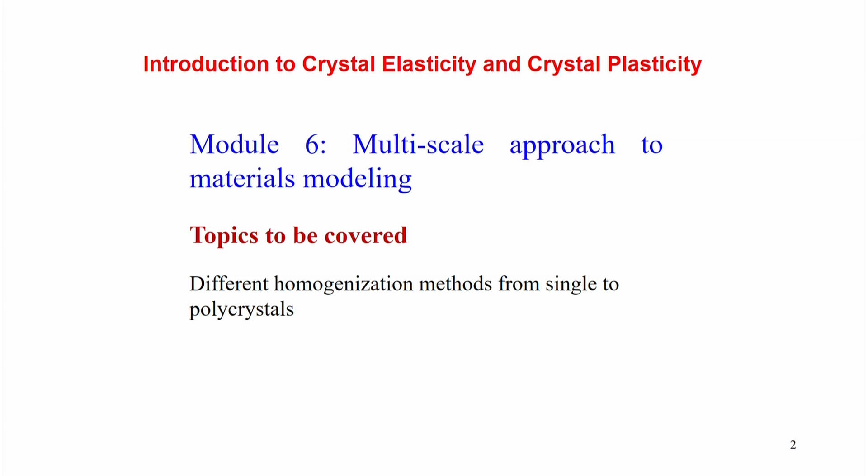Multiscale means we understand the modeling approach at different length scales or different time scales. The problem is how to link the different length scales and time scales, and what may be the consequence of the computational cost to do such different scales of modeling at a single time. Let us see how we can start with this.

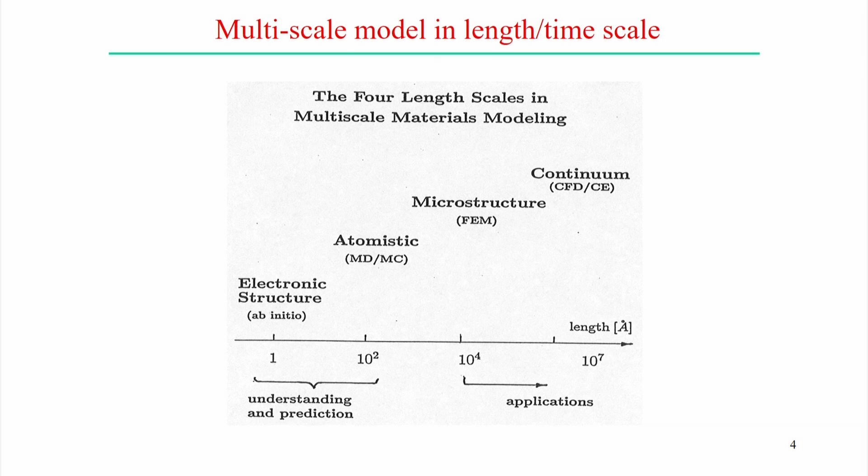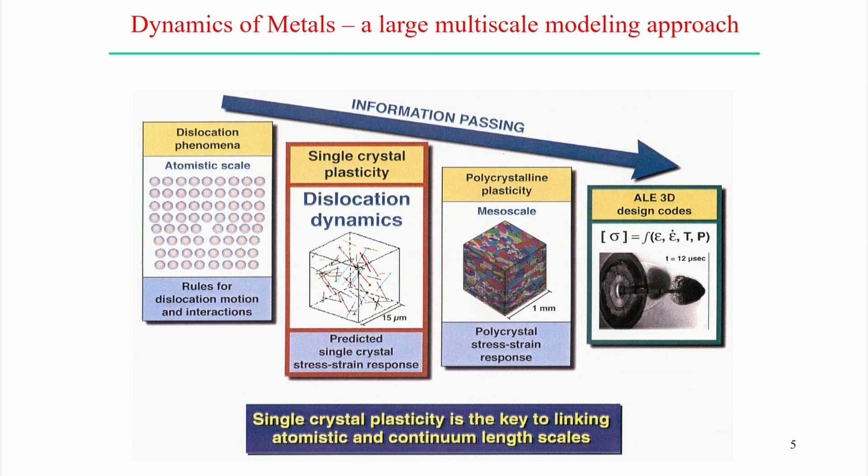In this case we estimated the von Mises yield surface, and from there we can predict the plastic behavior of the materials. So single crystal plasticity is the key factor to link the atomistic scale and the continuum length scale. But how we link between these two scales is most important in the multiscale modeling approach.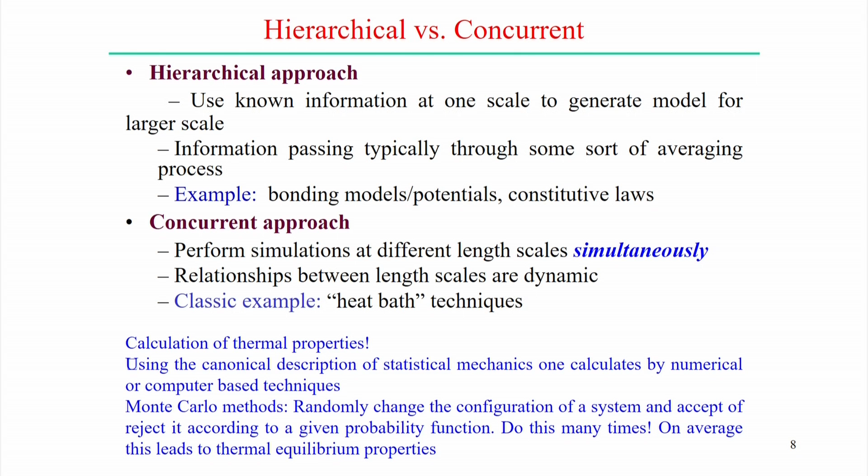So these are the typical approaches in multiscale modeling. Let us start with the atomistic methods. In this case, we use the empirical relation, and from the very beginning derived the force fields together with the semi-classical statistical mechanics to determine the thermodynamics and transport properties of the system.

But the statistical mechanics solve actually exactly. So of course the atomistic methods use the empirically derived force fields, but it can solve exactly the data. So what may be the advantages and the disadvantages of the atomistic method?

First one is that it can be used to determine the microscopic structure of more complex systems, probably on the order of 10 to the 4 to 6 atoms that constitute one system, and using that system the microscopic structure of the system can also be calculated.

But these models can also consider dynamical processes, probably on the longer time scale, up to the order of 1 microsecond. But on the other side, if you look at the atomistic methods, the results intuitively depend on the quality of the force field used to represent the system. So it's system dependent.

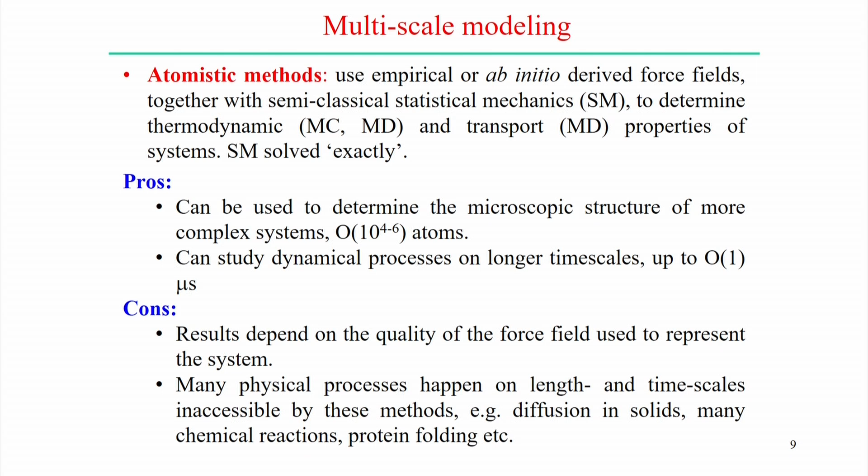Many physical processes happen on length and time scales inaccessible probably by these methods. For example, diffusion in solids, many chemical reactions, protein foldings - these types of physical processes are probably difficult to access using these atomistic methods. So that is the other side of these atomistic methods.

Now if we look into the mesoscale methods, they actually introduce simplification to the atomistic methods to remove the faster degree of freedom and consider groups of atoms as individual entities interacting through effective potentials. That means the cluster of a group of atoms represents one property, one state, and that can be considered in the mesoscale method. So probably this mesoscale method is the higher scale approach, higher in the sense that the length scale is bigger here as compared to the atomistic scale.

So the advantage is that it can probably be used to study the structural features of complex systems. In this case, the cluster of atoms or group of atoms can be considered of the order of 10 to the power 8 to 9 atoms to represent the system.

Dynamical processes on a time scale inaccessible to the classical methods, even up to 1 second, can be studied using the larger time scale of mesoscale methods. But the disadvantage, the darker side of these methods, is that it often describes only qualitative tendencies. The quality of quantitative results may be difficult to ascertain sometimes. In many cases, the approximations introduced limit the ability to physically interpret the results. So these are the two disadvantages if we consider the mesoscale methods.

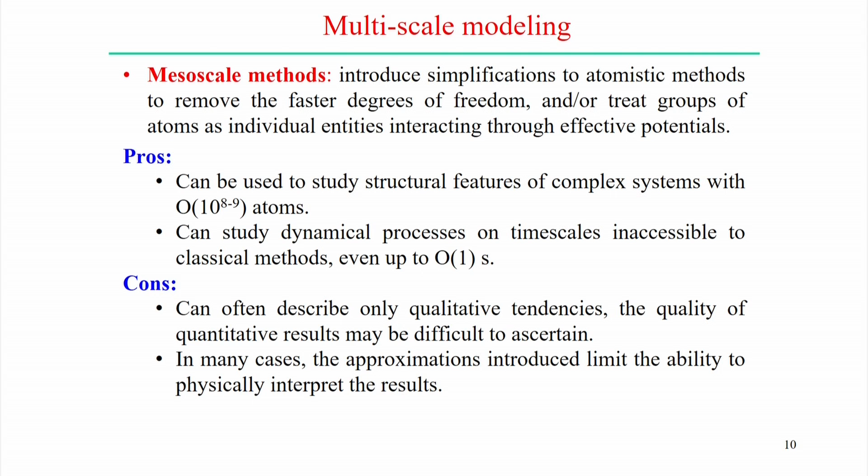Now continuum methods. In this case we assume that matter is continuous and treat the properties of the system as field quantities. We numerically solve the balance equilibrium equations coupled with phenomenological equations to predict the properties of the system. So this is the basic philosophy of the continuum methods.

In principle it can handle systems of any macro size and dynamic processes on a relatively longer time scale, as well as longer length scale. It is possible to numerically solve the balance equation. We generally solve the numerical governing equation on this scale.

But the difficulty is that the required input, for example elastic tensor, diffusion coefficient, equations of state from experiment, or derived from lower scale methods, is sometimes difficult to obtain. It cannot explain results that depend on the electronic or molecular level of detail. So continuum methods have advantages at one scale, but probably cannot capture the behavior of the system at the molecular level in detail, or the electronic structure in detail. In that case we need to consider lower scale methods, probably the atomistic scale model.

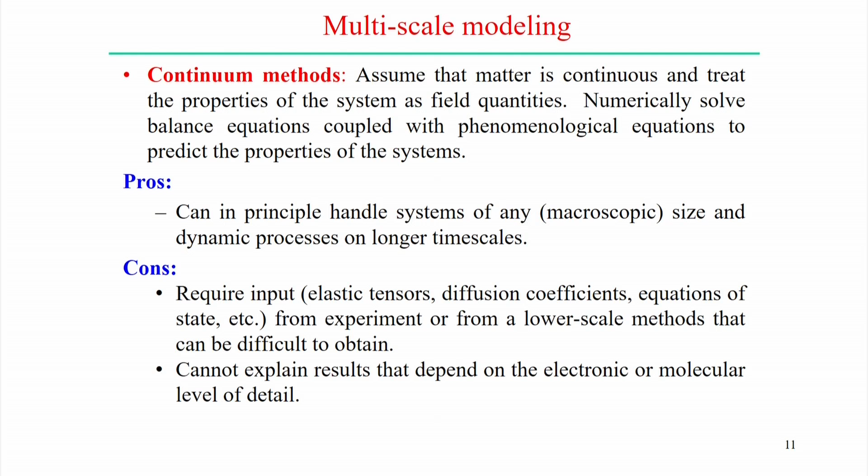Now of course there are different scales of analysis, and each and every scale has its own limitations or advantages in different ways.

The most important or significant thing in multiscale modeling is how we can connect different length scales. One approach is called upscaling methods, using results from a lower scale calculation to obtain the parameters for a higher scale method. This is relatively easy to do, and it is generally called a deductive approach.

Maybe we can look at an example to understand the upscaling method: calculation of phenomenological coefficients, for example the elastic tensor, viscosities, diffusivities, from atomistic simulations for later use in a continuum model. This is one example of the upscaling methods.

Fitting of the force field using ab initio results for later use in atomistic simulation is another example. Also, deriving the potential energy surface for a chemical reaction to be used in atomistic molecular dynamic simulations, and deriving the coarse grain potential from clusters or blobs of matter, or maybe polycrystal, from atomistic simulation to be used in mesoscale simulation.

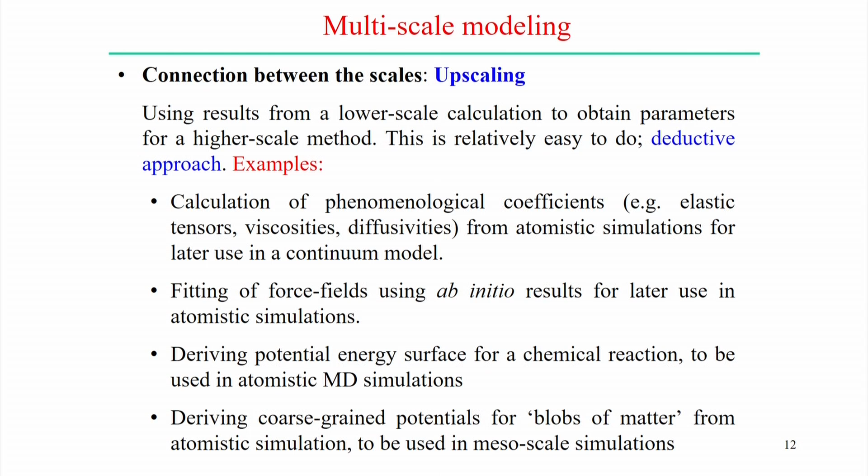So in all upscaling methods, we always try to link the lower scale properties and behavior in aggregate with the higher scale, or if there is any phenomenological behavior required for the higher scale methods, we can generally derive it from the lower scale method. That is the basic philosophy of upscaling methods.

Similarly, in the downscaling method, the basic philosophy is using higher scale information, most often experimental, to build the parameters for the lower scale method. But it is more difficult compared to the upscaling method because of the non-uniqueness of the problem.

We can take some examples. The results from a mesoscale simulation do not contain atomistic detail, but it would be desirable to use such results to return to the atomistic simulation level. That is called the inductive approach.

For example, fitting of the two electron integrals in semi-empirical electronic structure methods to experimental data such as ionization energies, electron affinities, etc. is one example of the downscaling method. Another is fitting of the empirical force field to reproduce experimental thermodynamic properties, for example second virial coefficient, saturated liquid density, and vapor pressure.

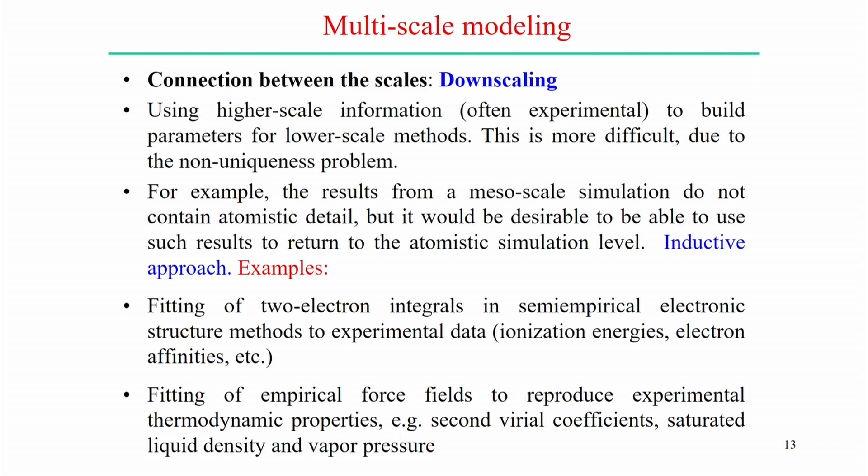Although theoretically it is more difficult, the downscaling approach links information from the higher scale to predict the behavior of the lower scale. But the other way, if it is possible theoretically to predict, experimentally it is easier to conduct experiments on the higher scale as compared to the lower scale methods, so in that way it is advantageous. So, looking at these two approaches, upscaling and downscaling, in the multiscale modeling.

Now, in general, a few significant points are important. First, in many physical problems, several scales are present in space or time, probably caused by inhomogeneity of the medium or complexity of the mechanical process. So a fundamental approach is to first construct the microscale models and then deduce the macroscale laws and constitutive relations by properly averaging over the microscale.

So if we look at the microscale and mesoscale models, we see the basic fundamental approach of multiscale modeling: linking the averaging of the lower scale and using this information for the higher scale approach.

The perturbation method of multiscales can be used to derive the averaging equations for a much larger scale from consideration of the small scale. So, in the mechanics of multiscale media, the analytical scheme of upscaling is generally known as the theory of homogenization.

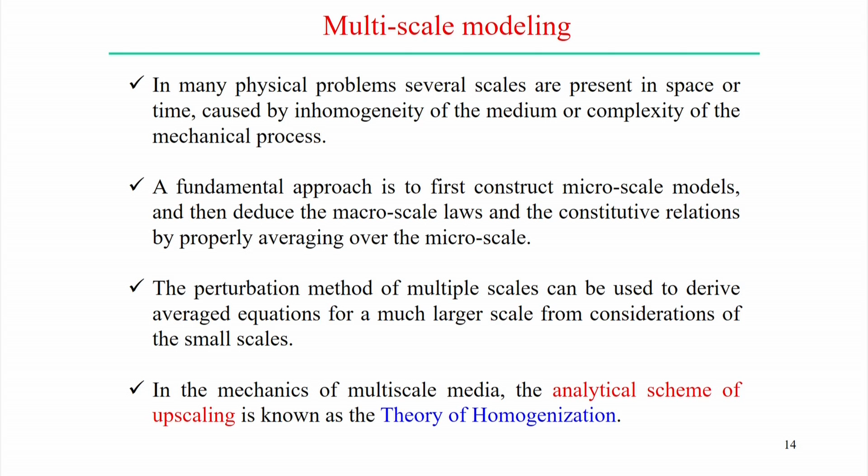Ultimately, the more practical approach in multiscale modeling is to consider the upscaling approach, which is relatively easier. Now let's look at some examples.

Let's take one example of the multiscale modeling approach: carbon nanotubes under tension, using atomistic results. In the first figure, expansion to a larger system and longer simulation times actually allow exploration and discovery of new behavior. So if we allow for longer simulation time, we can do simulation-based design and explore new behaviors. Let's look at this example.

At low strain values and high temperature, under that condition, the 5775 defect behaves as a dislocation loop. This constitutes one dislocation loop, made up of two edge dislocations, that is the 57 and the 75. Now, the two dislocations can migrate on the nanotube wall through a sequence of bond rotations.

Through a sequence of bond rotations, there is a glide direction, so the two dislocations can migrate separately along this glide direction. So in that direction, the two dislocations migrate here.

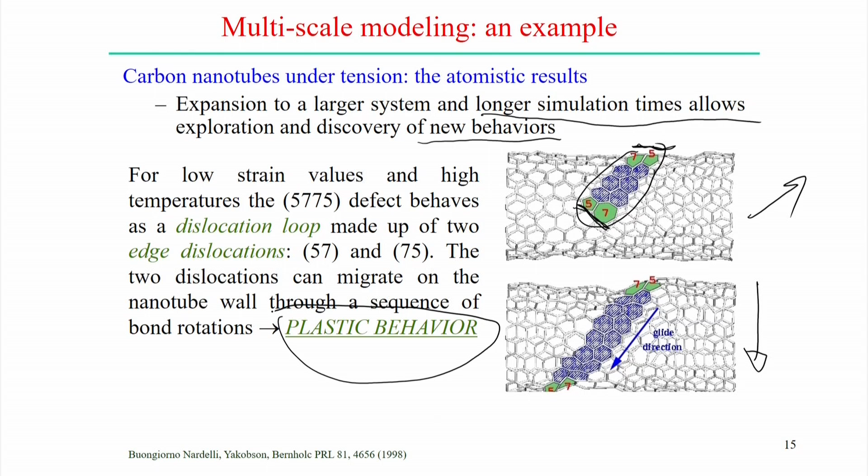In high tension and low temperature conditions, this predicts brittle behavior, whereas in moderate tension, it can predict plastic behavior of the carbon nanotube. These are typical examples of simulation-based design that we generally observe in the multiscale approach.

Now this is carbon nanotubes under compression, but this is a mesoscale result, so the scale is different here. Expansion to a mesoscopic system through finite element methods, with parameters modeled upon atomistic calculations. If we see axial compression simulation of 9 walls of carbon nanotubes and stress in the axial direction, that color predicts different deformation behavior corresponding to different stress levels and axial direction.

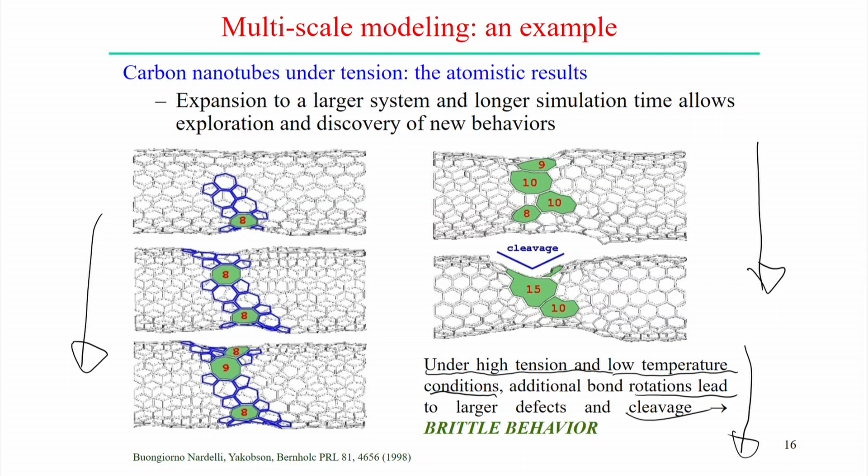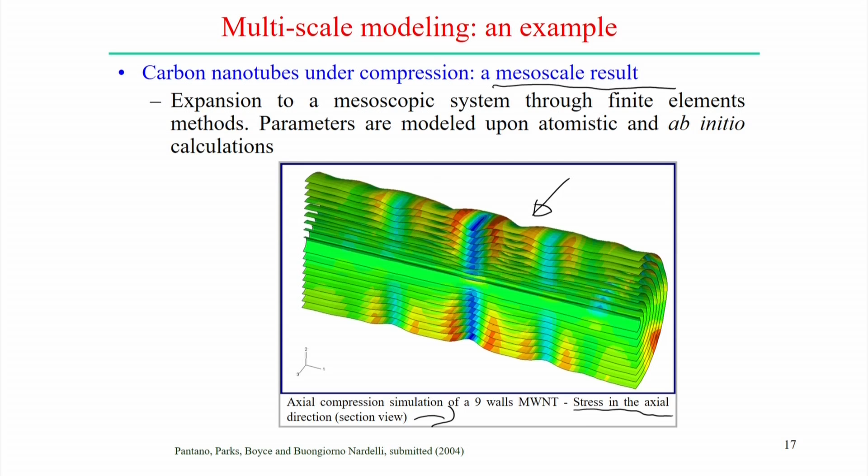So the point here is that the simulation can be done at different scales. If we conduct the experiment at the mesoscale, we can predict different behavior, and that is possible if we consider the different multiscale approach here.

In general, with multiscale modeling of materials, we always try to understand the molecular level origins of material behavior, but predict the behavior of materials from first principles. Along the x-axis and y-axis, the length scales are different, and time scales are also different. At the lower scale, femtosecond time scale and nanometer length scale, that can predict the behavior of electrons.

As a whole, at the next level, molecular dynamics predicts the behavior of atoms as a whole. Then using the behavior of atoms, we can get the mesoscale, mesoparticle behavior as an aggregate, taking information from the atoms. At the next level, we can consider the macro scale approach with elements, where the length scale is in the millimeter range and the time scale is in seconds.

This time scale or length scale is completely different from the other scales - there is a huge difference in all these things. But through the multiscale modeling approach, we can link the different scale levels, taking information from the lower scale level up to the upper scale level, even though the behavior or calculation theory is different at all scale levels. But if we try to predict with a multiscale approach as a whole, we need to link all the different scales. This helps to design new materials or devices with improved performance.

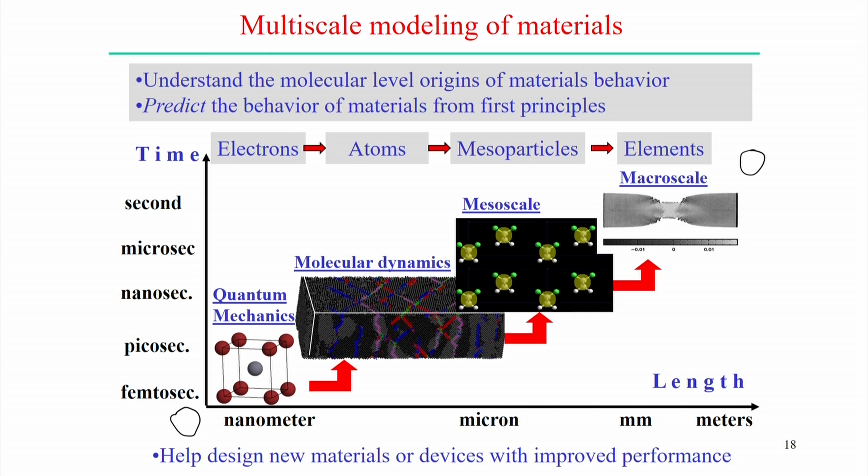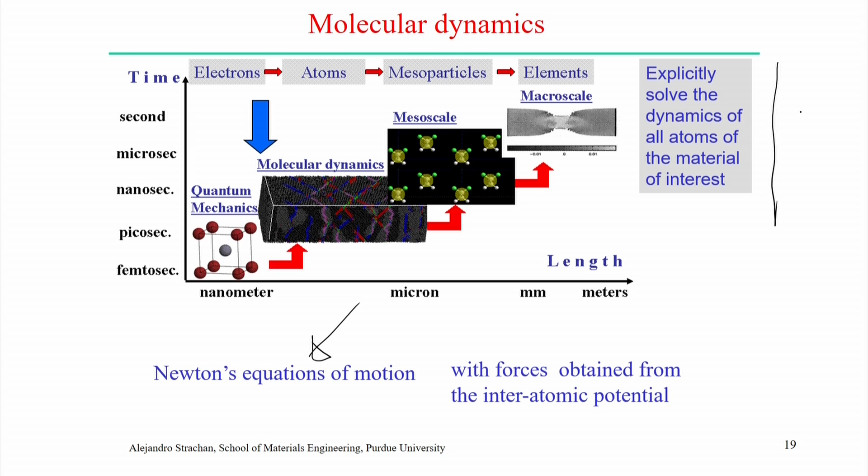Now, for molecular dynamics applications in nanomechanics of deformation, if we start from the basics, the crystal structure of metals, we start with the very basic model, the hard sphere model, that represents crystals as a regular arrangement of atoms.

If there is a disturbance of the regular arrangement of atoms, we consider the existence of a defect. It can be a point defect, a line defect, or possibly a surface defect. This representation of atoms in a crystal structure is on the nanometer scale.

Now, at the nanometer scale, to understand the mechanics, we already explained this regular arrangement of atoms. If it is subjected to a shear force like that, it will create dislocation defects. In this case it is edge dislocation, which is a very idealized case.

This is the existence of defects in terms of dislocation in the crystals - this is the dislocation. Now, there is a slip that happens over the cluster of atoms on a specific slip plane, and this accounted amount is the amount of shear strain.

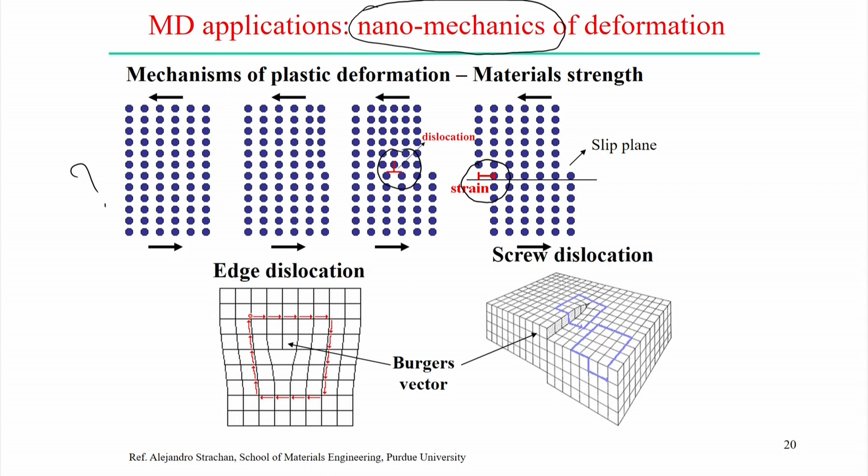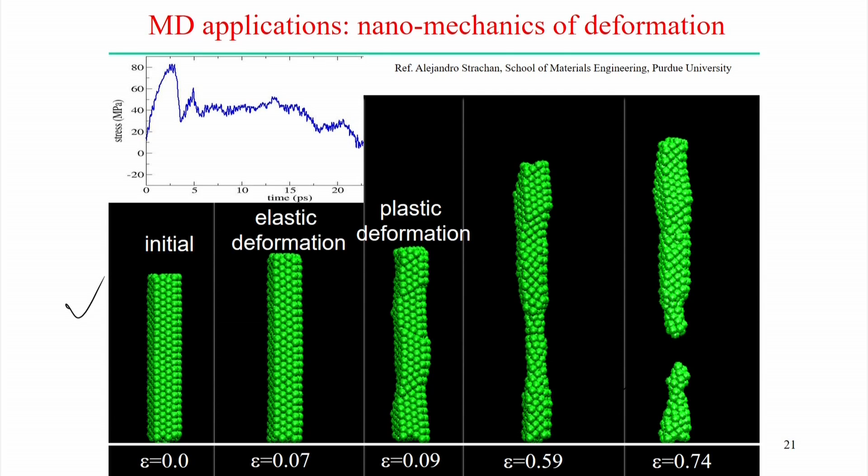At the picosecond level, the behavior of molecules, or if we do molecular dynamics applications, represents not a smooth curve of stress with respect to time—there is fluctuation. But if we conduct the same experiment at the nano or millimeter continuum scale, we can eliminate that fluctuating nature of stress versus time. This is the typical molecular dynamics application to explain the nanomechanics of deformation.

Multi-scale modeling is a very complex phenomenon with several challenges. First, there is a large number of degrees of freedom at the atomic scale, which is very high and not easy to handle or tackle.

To conduct simulation specifically at the very low atomistic scale is challenging. The second challenge is the interface—at the interface there is a mismatch of dynamic properties, and linking the dynamic properties in the atomic scale to the next scale is really difficult in multi-scale modeling.

The third point is consistent and accurate representation of mesoscale, microscale, and nano-level behavior within a continuum model. It is really difficult to represent all scale-level behavior in one scale—particularly, in continuum scale it is difficult to represent the behavior of the three lower scales.

The fourth point is how to link different time scales, because atomistic models are analyzed at the picosecond or femtosecond level, but in continuum scale we analyze in the order of seconds. So linking multiple scales is really difficult.

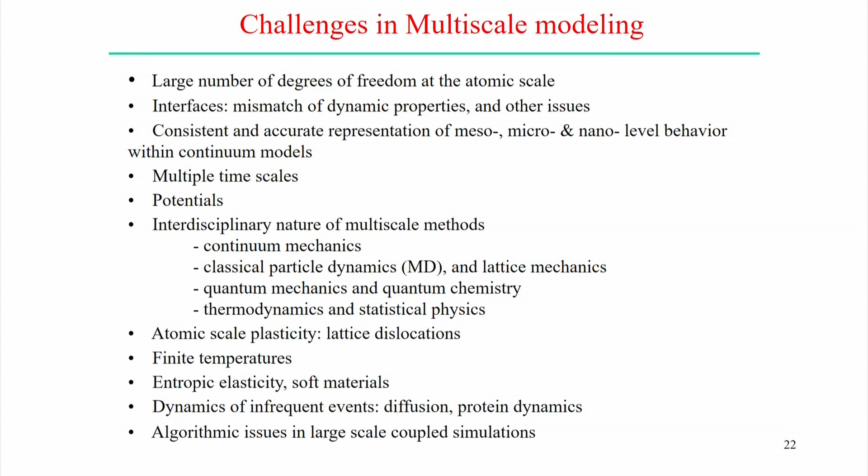The question is how to represent the interface to link the atomistic model and the continuum model. The discretization in the continuum scale and the discretization in the atomistic scale are actually different, and because the scales are different, how to link between these two scales is one significant issue.

The second point is how to handle the interface. When small and large scales intersect, the handshake is expensive and non-physical—spurious wave reflection may happen. So a handshake technique is required, but making the process successful to link these two different scales at the interface is difficult.

Sometimes there is double counting of strain energy, which is another issue. Implementation using molecular dynamics and continuum scales is hard, as we need huge computational resources, and parallel computational methods may be required in this case.

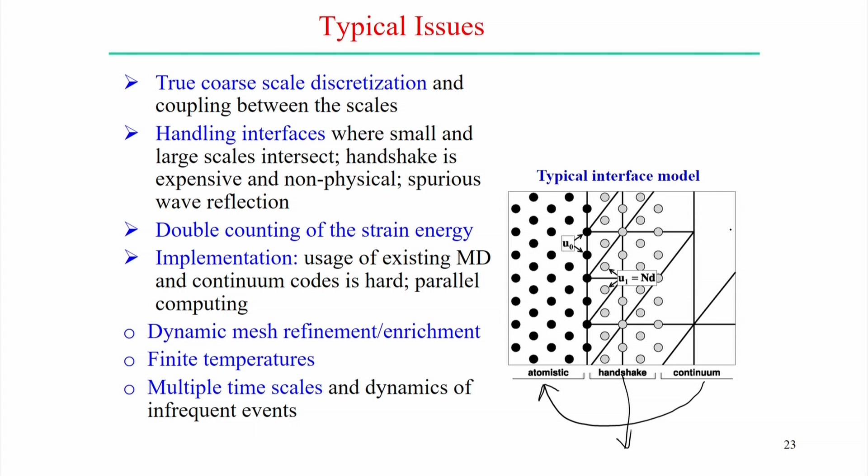So in general, we can say the difficulties are that the continuum scale and the atomic scale represent discretization of the domain at different scales. The second point is how handshaking works, meaning how we can link the two interfaces - that is the second difficulty in the multiscale modeling approach.

Now, why is multiscale modeling difficult? Let us look into the details.

Probably the wave reflection happens from the molecular dynamics simulation - this is the molecular dynamics wave reflection. And when you try to link the molecular dynamics and finite element method simulation, at the interface, how do we represent the wave reflection from the molecular dynamics?

Next, the large length scale cannot represent the wave length scales typically found at the smaller length scale. That is another difficulty, because the large length scale normally used in finite element methods is not suitable to capture the wave reflection specifically at the lower scale, for example, at the scale of molecular dynamics.

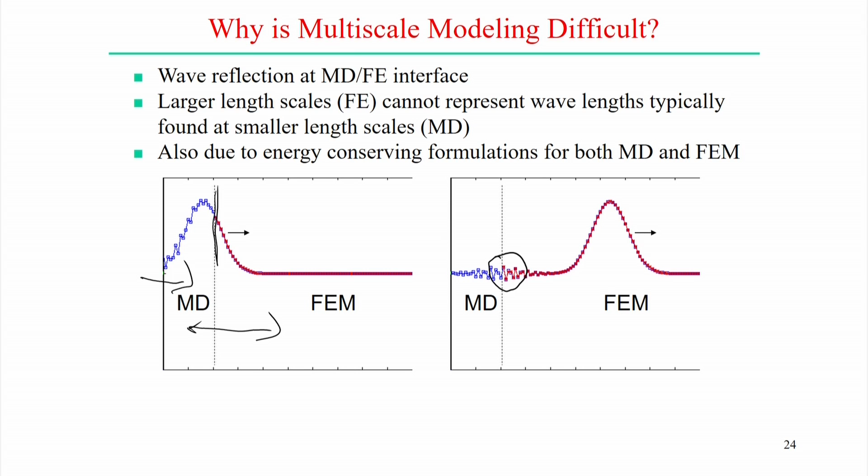Also, due to energy conserving formulas for both molecular dynamics and finite element method, it is really difficult at the interface how to conserve the energy when we try to link these two scales between molecular dynamics and finite element. So these are the typical issues.

Other issues, in general, preventing high frequency wave reflection requires reducing the molecular dynamic system so it can behave like a full molecular dynamic system. Reflection of high frequency waves can lead to melting of the atomistic system, so we should be very careful about how we reduce the molecular dynamic system to make it behave like the full molecular dynamic system.

At the same time, there is a definite need for a dynamic, finite temperature, multiscale method.

True coarse scale representation requires no meshing of the FEM down to the molecular dynamics lattice spacing. It is practically significant that it is not possible to create a mesh in the finite element method that actually satisfies the requirement for the molecular dynamics lattice spacing - that kind of meshing is difficult to do using finite elements.

At the same time, there are different time steps for molecular dynamics and FEM simulation. The time scale for the FEM simulation at different scales - mesoscale, continuum scale, or microscale - and the molecular dynamic scales are completely different, so matching or linking between these two is really difficult in the multiscale modeling approach.

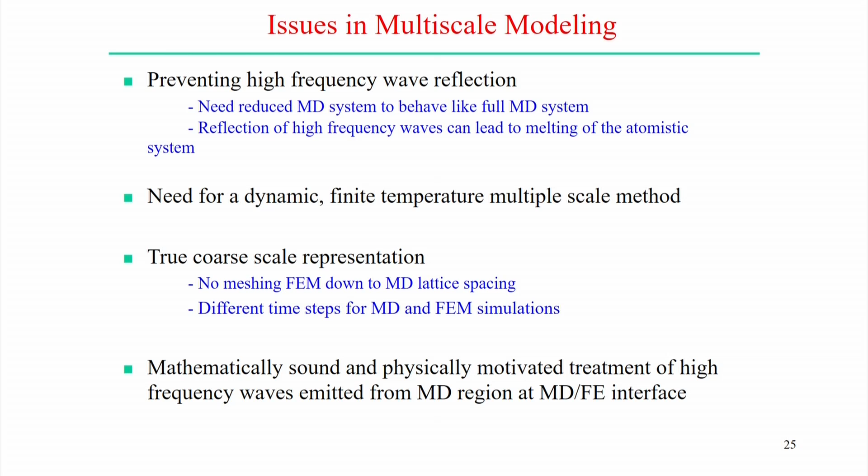So looking into all these challenges in multiscale modeling, let us now look into the macro scale approach to materials modeling. Here, the macro scale gives a fully homogenized description where the effects of both grain and subgrain heterogeneities on the material response are implicitly modeled by internal state variables.

Subgrain heterogeneity effects on the material response are normally modeled by considering internal state variables.

Second point: by discarding the explicit representation of the microstructure, this approach loses the capability to model the state of the material in terms of the direct mapping between microstructure and properties.

So when we try to idealize the polycrystalline behavior using the heterogeneity behavior of the single crystal, and represent the polycrystalline behavior as an aggregate, the individual heterogeneity behavior can be lost in this case, and instead we use some aggregate behavior at this scale.

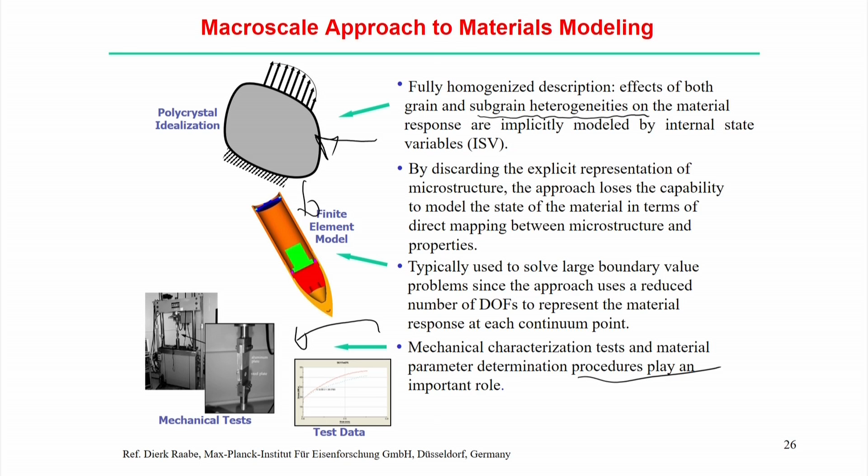Next, we represent the finite element model at the continuum scale. Here we need low degrees of freedom to represent the material response at each continuum point. But mechanical characterization tests and material parameter determination procedures play an important role - we conduct experiments to represent that behavior through mechanical tests, and use the test data of properties to do the simulation. Similarly, the mesoscale approach to materials modeling relates to crystal plasticity.

So, if you see the slip system, we generally use the slip system equation as rate dependent, and work hardening based on phenomenological models, and we can predict the slip system behavior of the polycrystalline structure. A relatively large number of internal state variables for hardening parameters are generally used, which implicitly address dislocation storage and interaction between dislocations. It is more predictive and robust than macroscopic plasticity, since it explicitly addresses the evolution of crystallographic structures and models for both anisotropic elasticity and plasticity.

However, the approach is computationally expensive. The mesoscale is the more predictive approach to consider the crystallographic structure and models for both crystal anisotropic and plasticity models. But in this case, the approach is also computationally expensive. So the point is, when you try to reduce the scale of the analysis, it becomes more computationally expensive to capture the behavior at different length scales or different time scales.

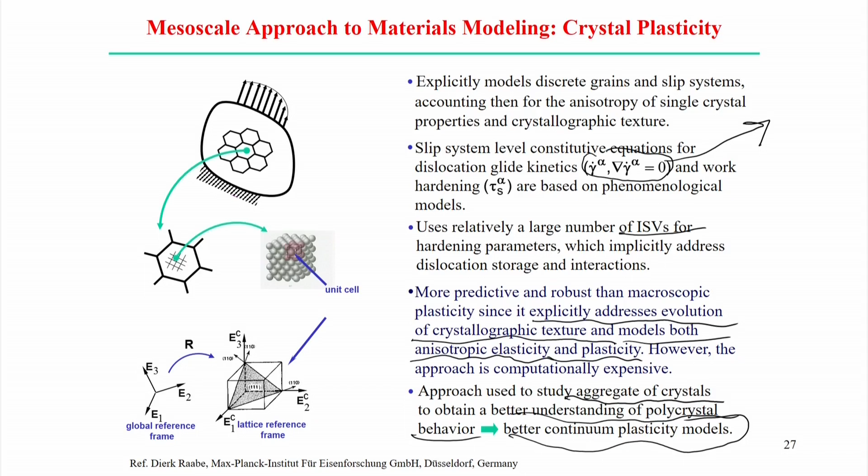This approach is used to study the aggregate of crystals to obtain a better understanding of polycrystal behavior. So better continuum plasticity models are probably needed, and we can enrich the continuum plasticity model by linking it to the mesoscale approach, where we explicitly consider different structural directions and the plasticity law, anisotropic plasticity in the polycrystalline structure. That is more predictive, enriching the models for the continuum plasticity model.

So it is also necessary to link the lower scale behavior to make it more predictive for the higher scale. Now, why investigate crystal plasticity at these scales? On the macro scale, we mostly consider a homogeneous material point and continuous plastic flow behavior. But if we lower the scale, to the micro scale, the behavior is different.

In this case, the material exhibits inhomogeneity or structural difference. Plastic flow occurs on discrete slip planes. Flow is anisotropic and orientation dependent. Of course, the structure evolves with deformation. So all this behavior at the micro scale, we can represent.

We can represent this micro scale behavior, which includes inhomogeneity and anisotropy, and link it to the macro scale model, which in most cases considers a homogeneous material point and continuous plastic behavior, because we have learned that if we consider crystal plasticity, we observe that plastic deformation of single crystals may happen with different orientations and directions on specific slip systems.

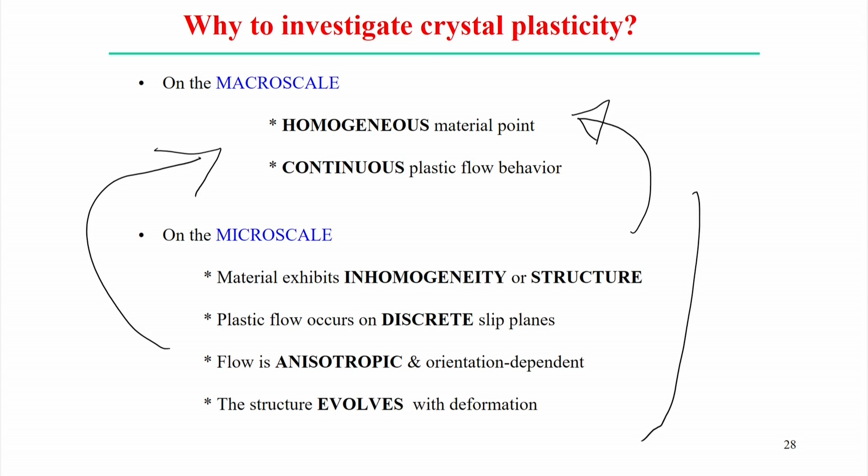By simply averaging the behavior, or considering the behavior in different ways, for example whether it is homogeneous or heterogeneous, or whether it is continuous or discontinuous. So that type of behavior needs to be considered when we try to do the modeling approach relative to the higher scale, specifically the macro scale approach.

Now, there are several important considerations regarding how computationally expensive the single crystal behavior is when you try to compute the stress-strain response of a single crystal structure. So what are the inputs to the system? First is the slip system. You need to know the slip system, the initial crystal orientation, and other material parameters need to be defined. These are the typical inputs to make the constitutive model for the single crystal structure.

Other inputs are the deformation rate at each crystal, and the kinematics of the deformation behavior, and the plasticity of the single crystal structure in terms of the flow rule, hardening rule, and orientation evolution, change of orientation evolution—all this constitutive information links together. And finally we can predict the crystal stress, the final crystal orientation, slip system hardness, and crystal stiffness.

So computationally, getting all this information to construct the single crystal constitutive models in terms of crystal stress, crystal orientation, slip system hardness, and crystal stiffness is really expensive, but it is necessary to model the deformation behavior of the single crystal structure.

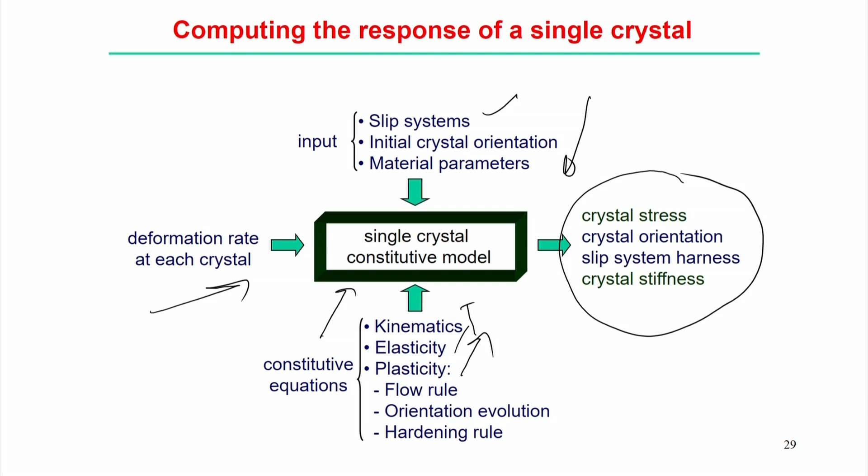Now, most of the time the material behavior is inherited from the lower length scale—that is the actual behavior. If we scale down, we can look into the actual physical phenomena associated with the materials, and if we go up in scale to a higher scale, we are essentially averaging the behavior specific to the macroscopic scale.

In the macroscopic case, motion is distributed among the individual crystals. We always try to follow the mean field hypothesis at the macroscopic level, explaining the grain behavior through different state variables which we average. This produces the mean field hypothesis, and through orientational averaging we can predict the macroscopic level at different state variables.

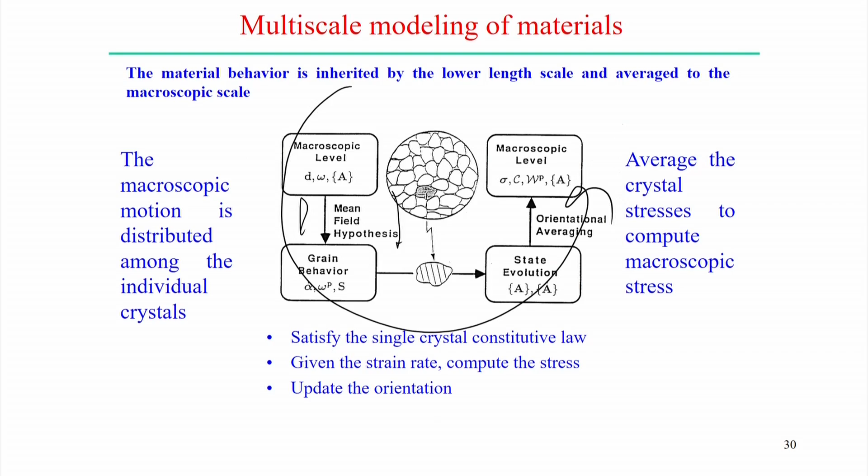We average the crystal stress to compute the macroscopic stress using this complete system, but this satisfies the single crystal constitutive law. Given the strain rate, we compute the stress and finally update the orientation. So this is one scale of approach.

In the next scale of approach, we generally use the constitutive models at the lower scale single crystal structure, and then zoom into polycrystalline behavior, focusing on the representative material element. That representative element behaves as a whole for this specific material.

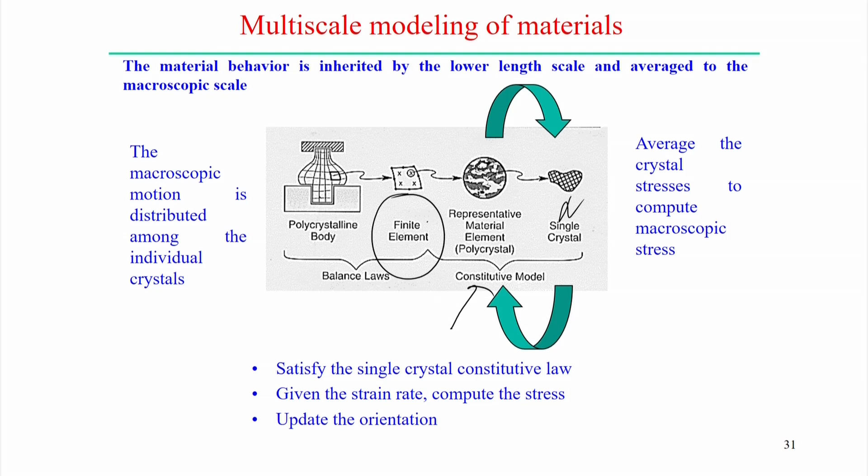In both cases we generally follow the constitutive model, but we try to utilize it at the larger scale polycrystalline body as a sample material in continuum scale, using finite element simulation with balance laws to predict system behavior. All these different length scales and time scales can be linked using multiscale modeling approaches.

The question is how a constitutive model interfaces with displacement-based finite element simulation. First we take an increment of the strain step, assemble the stiffness matrix, then compute the stress corresponding to the imposed strain increment. The stress is handed back to the finite element core to check if the weak form of the equilibrium or linear momentum equation is satisfied. If not, adjust the strain step, compute the new stress increment, and repeat until the weak form converges.

Once we get the converged solution, we shift the increment to the next time step. So: incremental strain step, estimate the stress value, check whether it satisfies the equilibrium equation. If yes, increment the time step to the next level; if no, adjust the strain step again. This is the typical approach of constitutive model interfacing with displacement-based finite element simulation.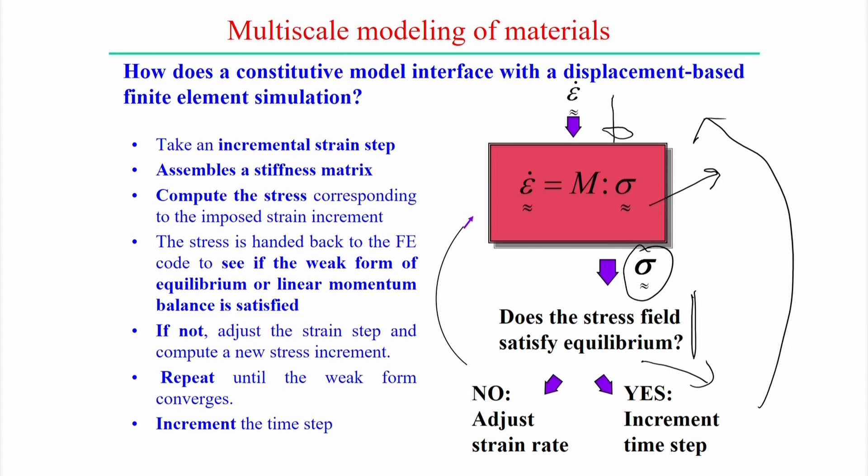In simulation, many tensor constitutive equations are reduced to a set of equivalent scalar equations to be solved. For example, when analyzing the continuum plasticity model, we assume an effective or equivalent stress value, sometimes called the von Mises equivalent stress, which is an equivalent representation of the stress state. If there are 9 or 6 components of stress, those components can be represented by one single value called the effective or equivalent stress, used to predict the law in plasticity models.

Similarly, we can convert a tensor into a scalar quantity and use it to modify different laws in the constitutive equation. Isotropic constitutive laws relate the magnitude of the strain rate to the magnitude of the stress, but for anisotropy, the stress tensor components vary independently.

Crystal plasticity models relate the rate of slip along a slip plane, considered as a scalar quantity, to the shear stress acting on that plane, which is also a scalar quantity. This shear stress is then constituted with respect to the rate of shear strain. Anisotropy arises because crystals and their respective slip systems can be oriented differently. Different stress values at different crystal systems can also be represented in equivalent scalar form, linked with a single stress state. This is another approach generally followed in crystal plasticity models.

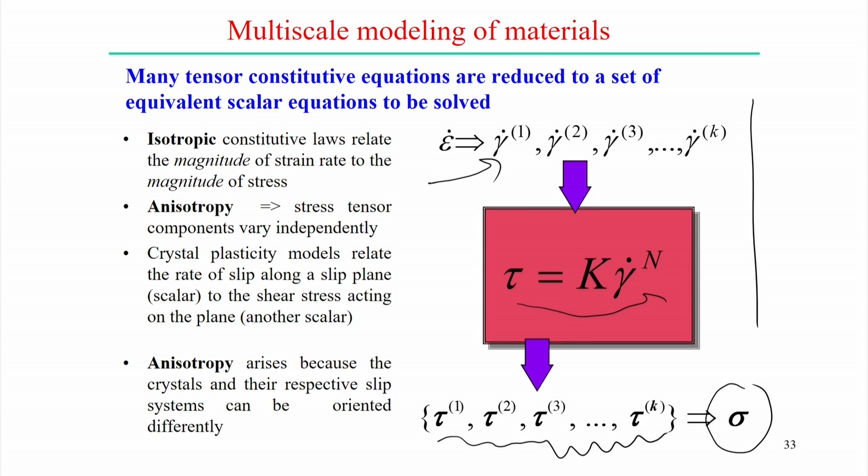Regarding microscopic motion inherited from the continuum level: how can we explain this? For example, if we conduct a simple tensile test on a specimen or sample, we can execute the tensile stress and obtain the corresponding stress-strain diagram.

But with the application of external loading on the samples, what changes happen microscopically? If we try to explain microscopically the single crystal behavior, we see that the single crystal experiences macroscopic motion. How is that? Recall that all motions can be broken down into pure shear and rotation.

plastic deformation, slip happens in the case of single crystal structure. You see that if you put the constraint, then some slip will happen along with the rotation. So the crystal can only shear along the slip planes, but the specimen axis remains fixed, so the crystal lattice also needs to rotate itself.

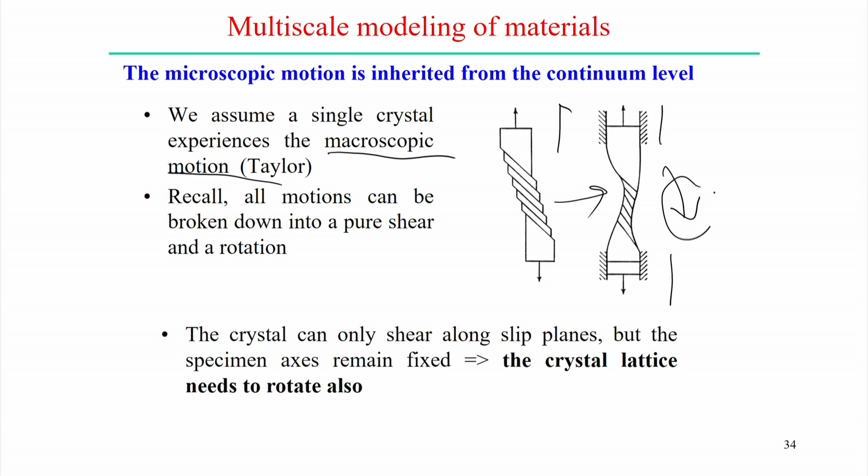So we can conclude that this microscopic rotation or microscopic motion is actually inherited from the continuum scale, so we need to consider that. That macroscopic motion we actually need to consider when we try to make a constitutive model in crystal plasticity.

So crystal motion is expressed in rate form, and the expansion related to the set of basis functions are tied to the lattice frame. In a different frame, the crystal motion is accommodated by slip plus a rigid lattice rotation.

So the crystal velocity gradient has contribution from the plastic slip, so both plastic slip as well as the lattice spin. These two components we can consider to explain the motion in terms of rate form.

And why? Because this is the reason sometimes we represent the hardening law in crystal plasticity in terms of the rate dependent form. But crystal motion occurs by the discrete slip on the slip plane.

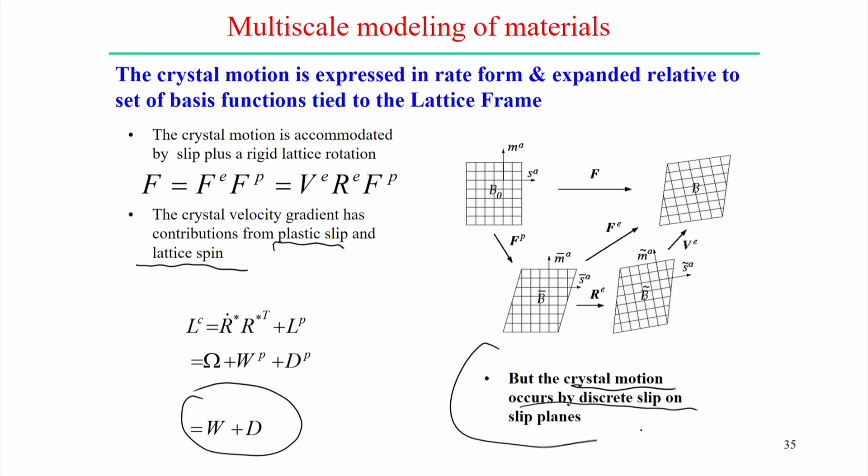Now tensor constitutive equations are reduced to a set of equivalent scalar quantities. We have already explained that sometimes we represent the stress tensor in the form of an equivalent equation, that is a single scalar quantity.

So slip systems are activated when the resolved shear stress approaches a critical value. That is true, but the rate of slip is related to the critically resolved shear stress acting on the plane. So that is the relation between the shear stress and the rate of shear strain.

And accordingly, we can consider the kinetics as a fixed state. So if you see the figure on the right hand side, for different values of M, the relation between stress and strain rate, this constitutive relation can vary depending upon the different values of M.

So with this behavior, it is probably possible to describe the evolution of state from the hardening rule. The resolved shear stress and the slip shearing rate can be written in terms of the crystal stress tensor and the crystal deformation rate tensor respectively.

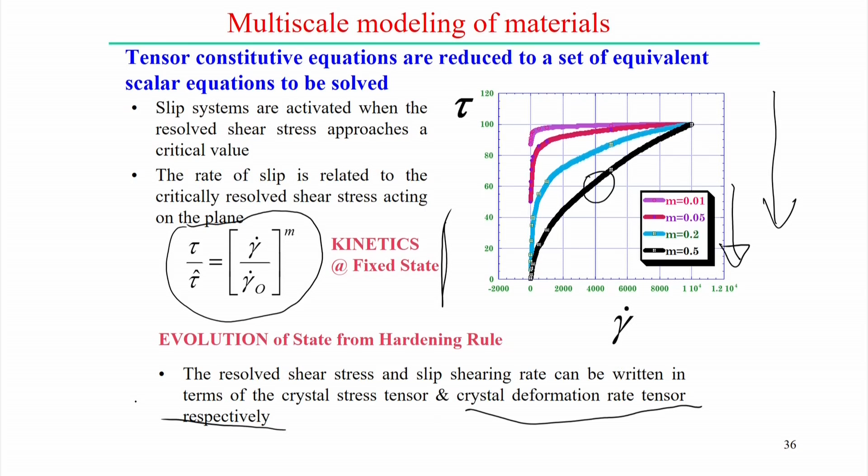I am not going into much detail on the mathematical derivation related to all these phenomena, but ultimately we can form the constitutive relation in terms of the shear stress and the rate of shear strain, and accordingly we can evaluate the hardening rule even in the crystal plasticity model.

Similarly, alternative averaging methods have also been developed in an attempt to minimize the number of state variables. That is also another important issue in the microscopic model, whether it is possible to reduce the internal state variables through some discrete averaging of certain properties.

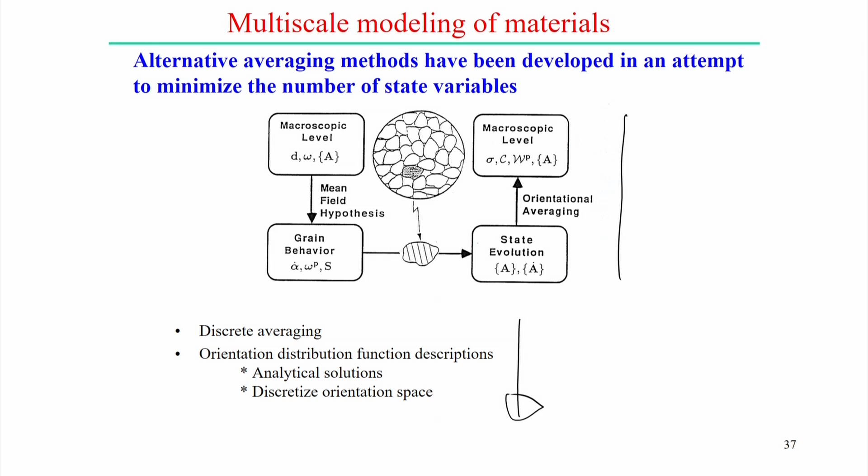So through analytical solutions or discretization in space, we can derive orientation distribution functions that try to give description based on the analytical solution or discrete distribution space. It is possible to reduce the number of state variables in the microscopic model.

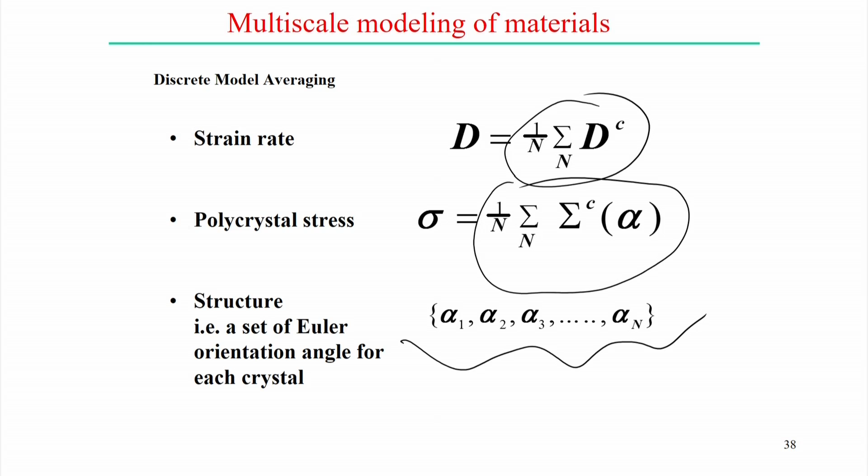So this is the discrete model averaging: averaging strain rate, and polycrystal stress we can make through averaging, and structure is a set of Euler orientation angles of each crystal. So these are the typical discrete model averaging of all the state or properties.

Now we come to the second part of these things, the modeling of engineering materials and what are the different approaches for that. If we see modeling of engineering materials, there are different scales. We have explained several times that there is a different length scale and time scale: quantum mechanics, molecular dynamics, mesoscale and macro scale. Probably these 4 or 5 scales can be used to explain the multiscale modeling approach.

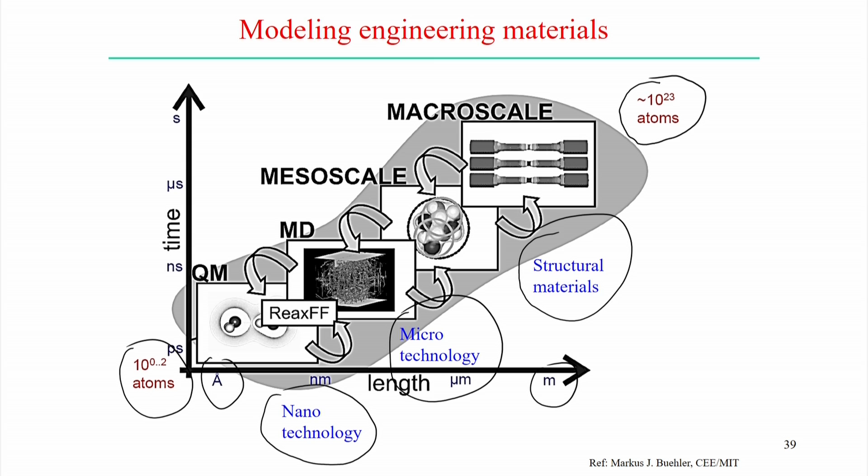Now about quantum mechanics, molecular dynamics, based on the mechanics or basic physics, the nanotechnology can be explained. Then based on the mesoscale application, microtechnology has come out, and finally the macro scale approach, the structural mechanics or continuum mechanics approach can be explained over the different scales. So across scales, multiscale analysis, accordingly different levels of technology have been developed.

Now in general, the multiscale modeling approach, the computational modeling generally aims at developing systematic techniques for bridging the scales. For example, between the atomistic models and continuum models, in order to increase the speed or enable dynamical calculation. That is the basic objective of multiscale computational models.

Continuum level models can simulate larger volumes of materials, which is not possible for molecular dynamics, typically at the expense of accuracy. Of course, when we consider continuum level models for large volumes of material analysis, it's not possible to capture exactly the phenomena at the lower scale, quantum mechanics or molecular dynamics.

So continuum level models always analyze large volumes of materials, but at the expense of accuracy. Conversely, nanoscale models can accurately capture small scale phenomena and features, but are computationally too slow to simulate compared to large volumes of material. Computationally expensive large volume material analysis is the main obstacle when trying to capture nanoscale phenomena.

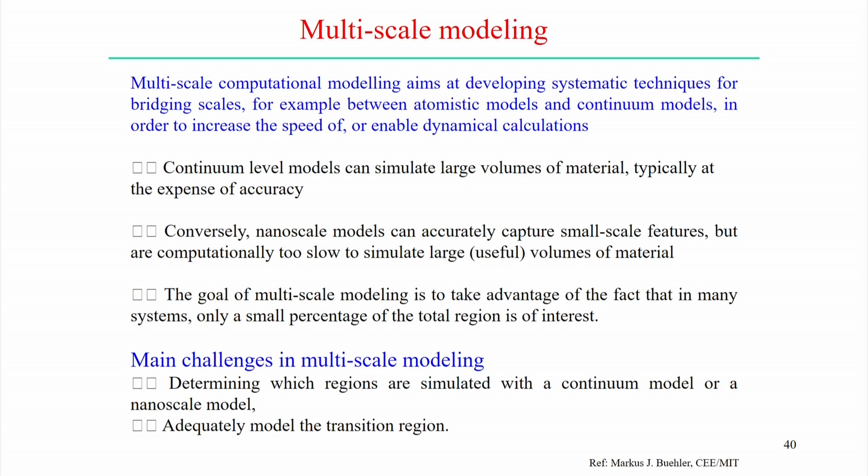That is the basic philosophy of the multiscale modeling approach. But the main challenge in the multiscale modeling approach is determining which regions are to be simulated with the continuum model or the nanoscale model, and adequately modeling the transition region. That is the main obstacle related to multiscale modeling.

One approach explains the concurrent multiscale modeling approach and the hierarchical approach. So here we will try to look into the concurrent multiscale modeling approach.

One thing is that the strength of material is actually dominated by the existence of cracks or other defects or flaws. So probably the concurrent multiscale modeling approach will try to explain this, considering the strength of material or formation of cracks during

deformation of the metals. Cracks and similar defects lead to stress concentration, which in turn leads to the nucleation of dislocations or generation of material surface. So generation of cracks can be explained like that: nucleation happens, it starts from nucleation, then development of a small crack, and after that fracture happens in the sample material of interest.

Now, defects lead to highly localized regions in materials, where the material undergoes strong deformation. Therefore, division of the computational domain into different regions of different accuracy is possible, depending upon the strain gradient.

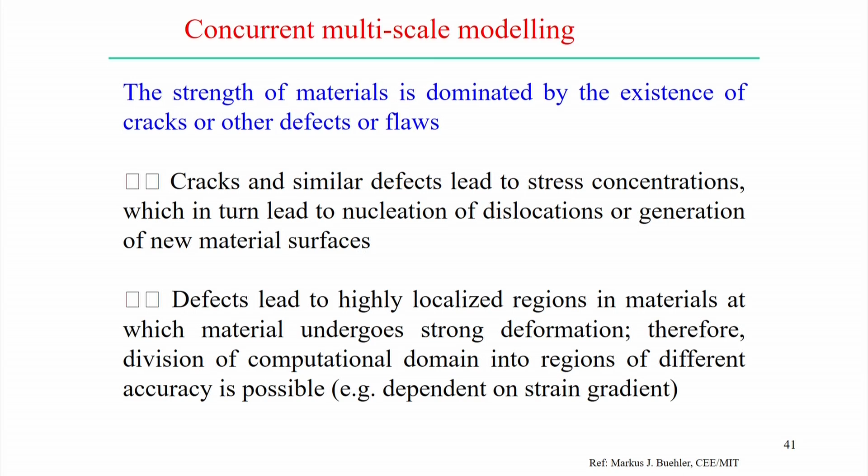So probably we can link the atomistic behavior to the scale of the continuum when we try to analyze fracture mechanics, to get the actual information about the cause of fractures at the scale of molecular dynamics or at the next level of scale.

But how can we do that? Consider the continuum displacement field: if you see the atomistic region, the time step here is around the order of a femtosecond, but in the continuum region, the time step is of the order greater than a millisecond. The atomic displacement field is probably related to the fast oscillations of the atoms.

Now, how can we link these two scales through the multiscale modeling approach? Normally, we try to avoid wave reflection at the interface between the molecular dynamics level and the finite element level. It is possible to make a seamless interface, because wave reflection may have a dramatic impact on the results, sometimes leading to melting. So making a seamless interface is probably one challenge for the multiscale modeling approach.

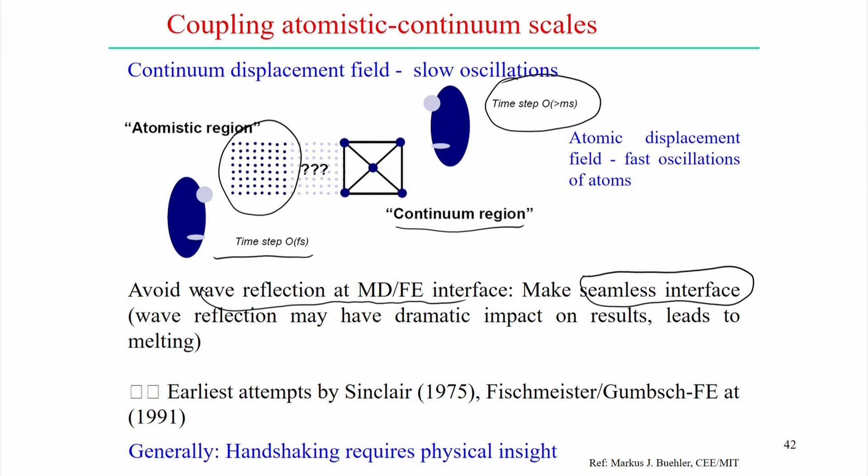Several attempts have been made earlier, but normally people follow handshaking between the link between these two scales of analysis. For handshaking we need physical insight into the mechanism of the process. In the handshake region, coupling between regions of different level, scale or accuracy can be achieved using the handshake regions. In this case, exchange of information associated with each modeling is required, so translation rules or a specific algorithm is needed to exchange the information at the handshake region. So what are the typical properties?

If you look at different properties at different scales, atomistic scale and continuum scale: temperature at the atomistic scale is represented by random velocities, but at the continuum scale it is more associated with thermodynamic energy. So the same property is represented or associated differently at the two scales. Displacements: atomistic displacement is fine at the atomistic scale, but at the continuum scale, continuum displacement is not very fine, it is coarse. So in this case, atoms are not treated as the main elements, but atoms can be considered as a subset within the continuum scale.

Particle velocity at the atomistic scale includes high frequency vibrations, but at the continuum scale only low frequency vibrations are relevant. Particle forces at the atomistic scale are represented by atomic forces, which are pointwise and discrete. But at the continuum scale, particle forces can be represented in terms of continuum forces, which are distributed. So there is a huge difference in how different properties are represented at different scales.

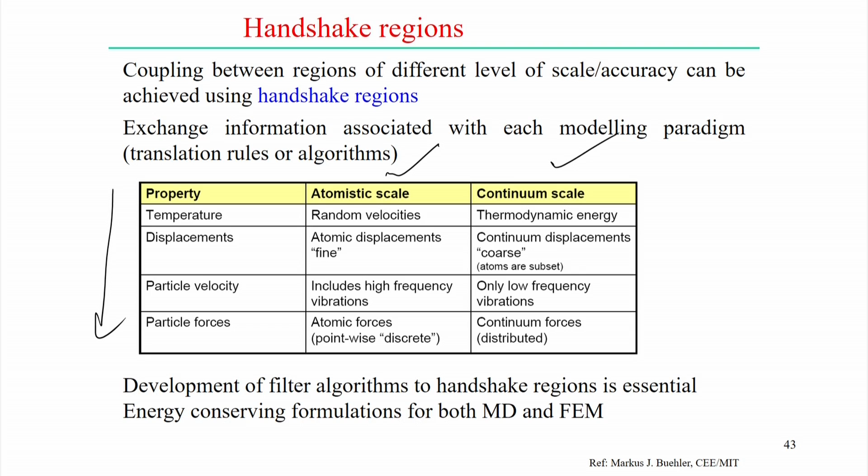Therefore, it is necessary to develop a filter algorithm in the handshake region, and also energy conserving formulas at the handshake regions for both molecular dynamics and finite element methods when you try to link these two scales.

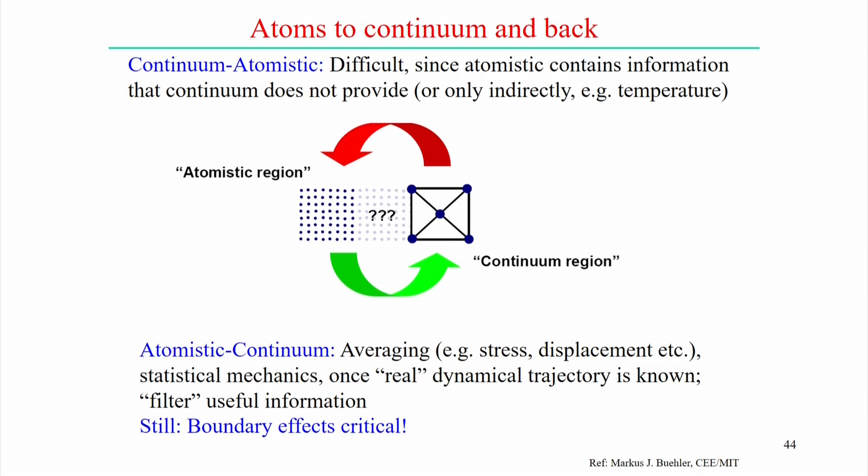Now, linking continuum and atomistic scales is of course difficult, but since atomistic analysis contains information that continuum does not provide, or only provides indirectly, for example in terms of temperature, atomistic analysis gives that one point. Then, through averaging of stress, displacement, and statistical mechanics, once the real dynamical trajectory is known, we can use a filter to get useful information. But boundary effects are still very critical when linking between these two scales.

Domain decomposition is one of the algorithms in the multiscale approach. Simply put, the first step of the concurrent multiscale model is typically decomposition of the computational domain according to several criteria we can follow. So how can we decompose the different domains? There are several criteria.

The first criterion is foreign atom types, where a method treats atom type X and XY interactions. The second is strain, atomic strain or stress localization state, based on which we can divide the different domains. Large forces between atoms suggest bond breaking or bond formation, so that can be the criteria to divide domains. Large strains or cohesive energy, or simply geometric criteria or information such as interfaces or boundaries, can also be used to decompose the different domains.

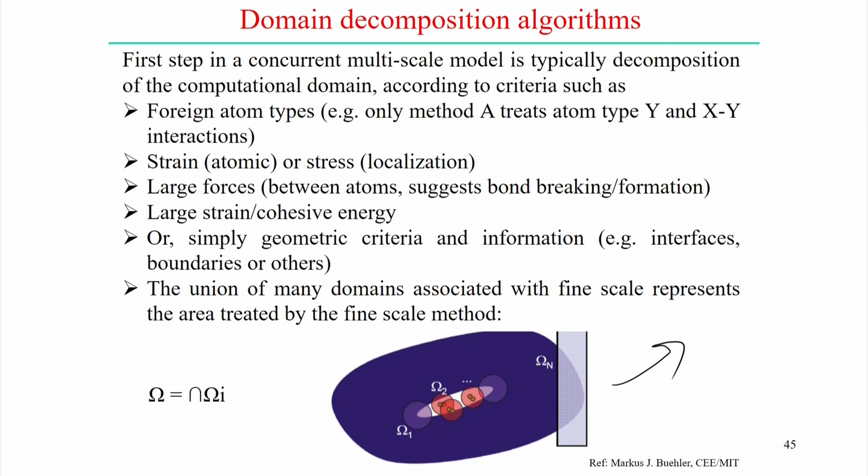So this is one simple way, the domain decomposition algorithm.

Another is the concurrent multiscale method, the coupling of the length scale, typically called the MAAD method. It is a typical link between finite elements, molecular dynamics and tight binding, all used in a single calculation. The MAAD method, actually called macroscopic, atomistic, dynamics, captures this behavior in a single calculation.

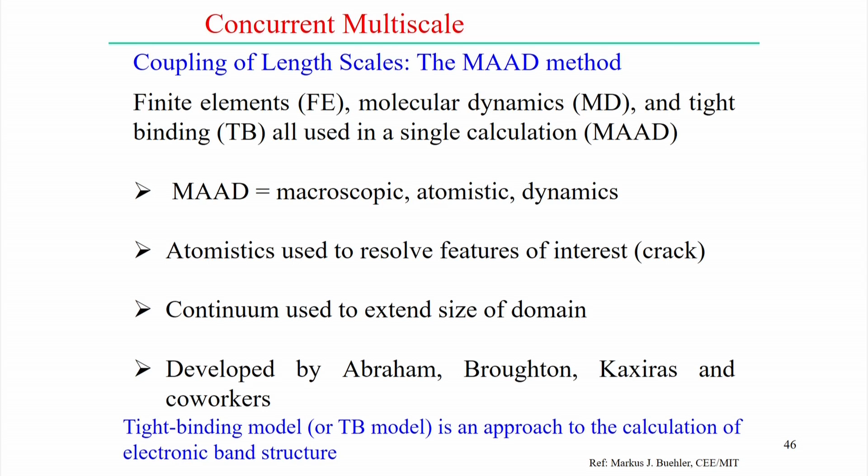Tight binding means a model generally used as an approach to calculation of the electronic band structure. In the MAAD method we use three different scales of information: macroscopic, atomistic, and dynamics. Atomistic is used to resolve features of interest, for example a crack, and continuum is used to extend the size of the domain. Taking advantage of continuum and atomistic in their individual areas of interest and merging them, the MAAD algorithm has been developed.

This is a schematic diagram for the MAAD method. It shows simply how it couples tight binding, molecular dynamics, and the finite element method. The transition regions are very thin, desired of course due to computational expense.

Displacement and velocity link between the scales based on the kinematics, and the time steps are governed by the atomistic scale, tight binding and molecular dynamics. That time scale generally follows the order of femtoseconds, but is limited up to nanoseconds. Expect wave reflection from the finite element and molecular dynamics interface, this method works well.

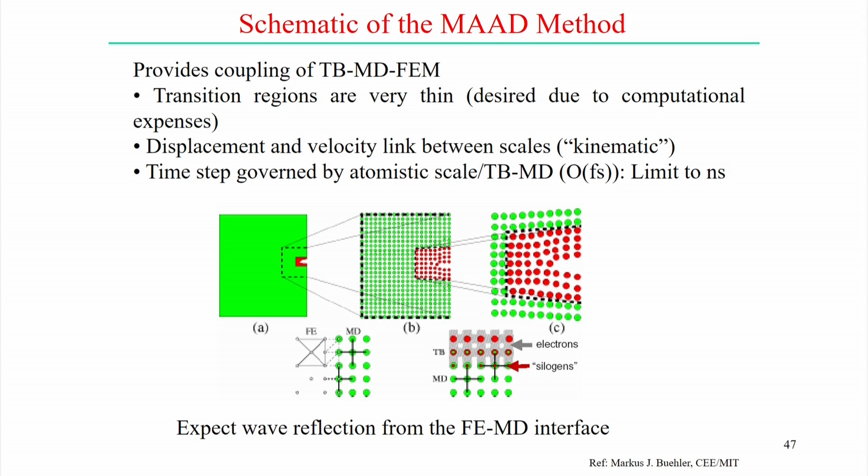Now another basic method is the quasi-continuum method, which couples the empirical potential to continuum models. The key idea is selective representation of atomic degrees of freedom - it's not necessary to consider all degrees of freedom at the atomic scale.

If we are more selective, that selective scale can probably be representative of the molecular dynamic scale. Instead of treating all atoms making up the system, a small cluster or subset of atoms is selected to represent, by appropriate weighting, the energies of the system as a whole. So only this system of atoms represents the whole energies of the whole system, using appropriate weighting of all the atoms if needed.

Based on their kinematic environment, the energies of the individual representative atoms are computed either in a non-local fashion, corresponding to straightforward atomistic methodology, or within a local approximation befitting a continuum model. Assuming the local approximation befitting the continuum model, since few atoms represent the whole system, the representation is of varying density, with more atoms sampled in highly deformed regions such as near defects.

Strategically, if a high deformation gradient exists at a point, we can increase the represented atoms there to capture the phenomena more precisely, and correspondingly fewer atoms are used in less deformed regions further away, which is adaptively updated as the deformation evolves. In that way we can conduct these experiments - that is the basic philosophy of this method.

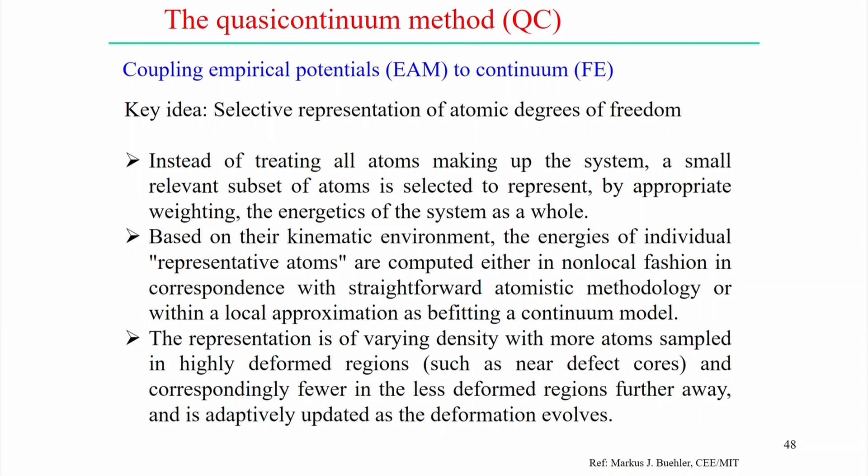Now, the quasi-continuum method actually provides an alternative to handshaking. The basic idea is to obtain the finite element stiffness matrix on the fly based on the atomic lattice or potential, not requiring any prior assumptions - a zero temperature relaxation technique. The elastic energy used in the finite element region is computed by applying the finite element interpolated displacement field using the Cauchy-Born rule, for example, to a reference system of atoms interacting by molecular dynamics forces based on the finite EAM potential.

But the difficulty is that there is no thermal fluctuation since atoms are at reference positions. Therefore, sometimes ghost forces arise due to the discreteness of the system, and there's the problem that the molecular dynamics probing is based on the discrete displacement field.

So if we look at this, one continuum model will link to the MD model based on the discrete displacement field, and using the Cauchy-Born rule provides the constitutive equation on the fly. The Cauchy-Born rule states that the infinite crystal underlying each continuum particle deforms according to a local uniform continuum deformation gradient F, which is used to extract the constitutive law.

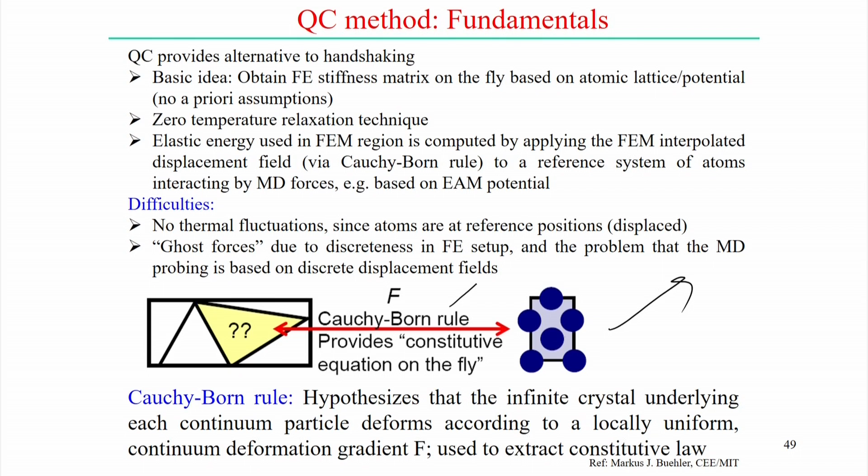Another example application is deformation of thin films - the biaxial loading by thermal mismatch of the film and substrate material. High stress causes severe problems during operation of the device. Schematically, we see biaxial stress subjected to a polycrystal structure. Deformation is localized at the grain boundary, so in this case the dislocation and grain boundary interaction is important to know.

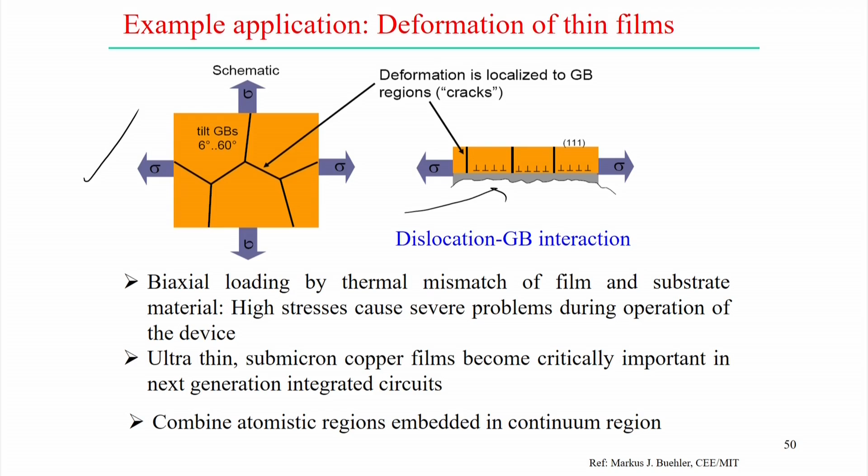If we look at the idealized system in polycrystalline form, we can represent this stress, and near the grain boundary there is a cluster of dislocations - deformation is localized near the grain boundary region. This is practically important because submicron copper film becomes critically important in next generation integrated circuits. In this case, only by combining atomistic regions embedded in continuum regions, following the multiscale modeling approach, can we address this kind of problem.

But non-local QC methods, in this case, do not use the Cauchy-Born rule as the local QC method does, but instead use a full non-local representation to determine the forces.

What are the features of this non-local QC method? It is truly seamless, there is no boundary present between the atomistic and continuum regions, but it's a very smart scheme to avoid double counting of the bonds. We use the explicit expression for forces on the nodes, atomic limit, each node and one atom, and evaluate a small cluster around node J. In a typical cluster there is no overlap, it's an overlapping cluster.

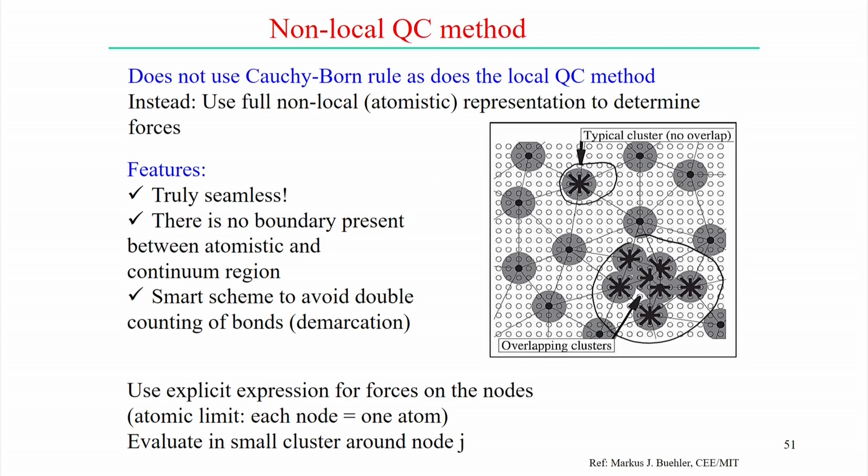So this is basically one kind of non-local QC method, and the most important feature is that no boundary is present between the atomistic and continuum region. This approach can be used to solve the multiscale modeling problem.

Coupling is achieved by the nodal displacement in the handshake region. In terms of atomic displacement, forced to agree with the finite element displacement, and paired atoms agree with the finite element displacement. So paired atoms actually agree to the finite element displacement, but coupling happens in the handshake region, so the atomic displacement is basically agreed with the finite element displacement.

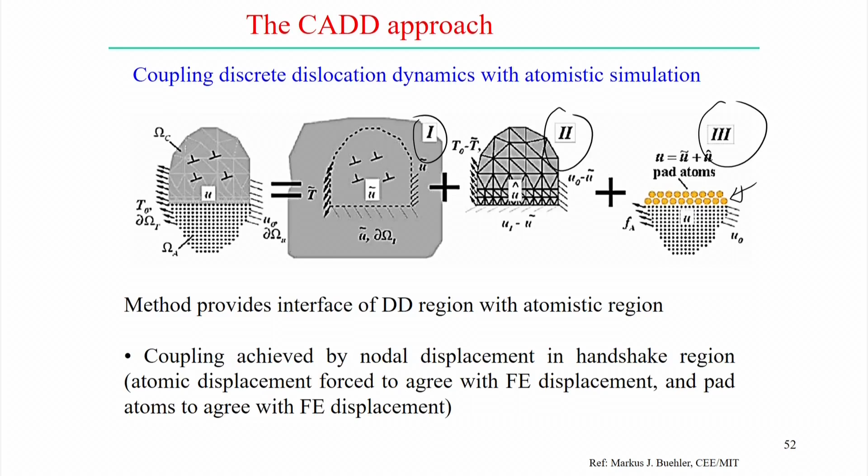So this is the CADD approach, using the coupling of discrete dislocation dynamics with atomistic simulation. Schematically, this is the interface atoms, and on the right hand side is the continuum region, with pad atoms. The coupling here is similar to the MAAD approach, but it is under quasi-static conditions.

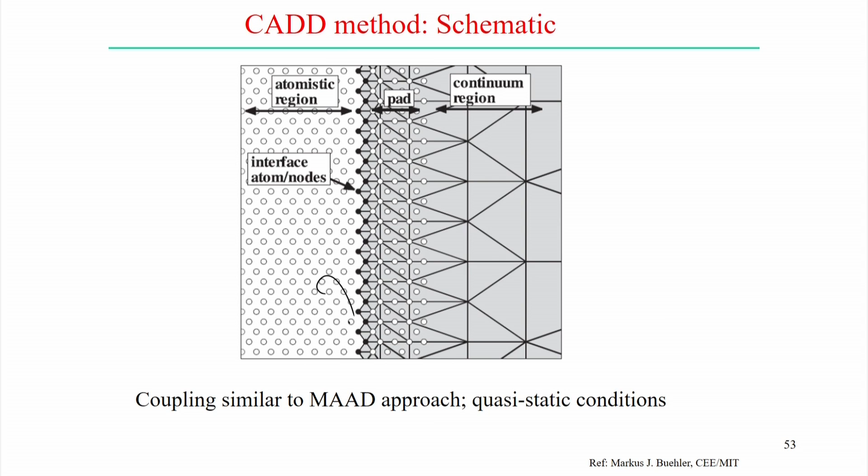Now another method is called the bridging scale method. We use this multiscale modeling approach to couple the atomistic scale to the continuum scale at finite temperature. In this case, the finite element representation exists everywhere in the domain, even where molecular dynamics is also present. We use a projector operator to represent the displacement field as orthogonal combinations of small scale and coarse scale.

What are the advantages of this bridging scale method? The atomistic and continuum scale do not have to be integrated using the same time step, as is generally done in the MAAD scheme. High frequency oscillations naturally disappear when leaving the atomistic core region via the impedance force. The atomistic region senses finite temperature in the finite element region via the stochastic force.

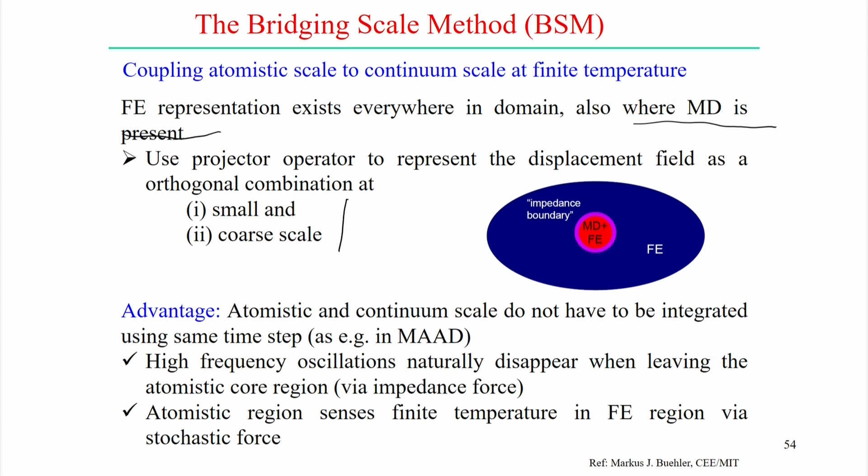So this is another typical bridging scale method we generally follow in the multiscale modeling approach. If we consider the area of interest, for example a crack, the molecular dynamics representation is on one side, and the right hand side is the finite element zone in the continuum scale.

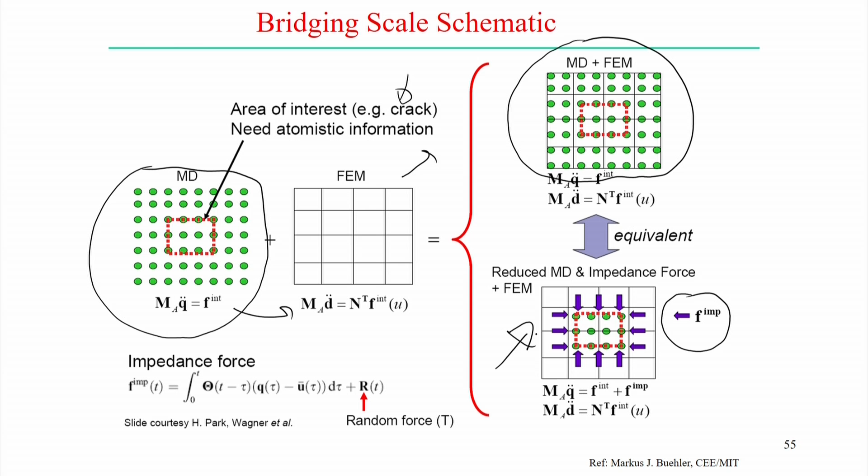So if we add these two, we can represent MD plus FEM in this zone, which is the equivalent form, represented correctly as force f imp — reduced MD and impedance force plus FEM represented correctly this way. So this is the other way to link and bridge the different scales following a specific strategy.

So these are all the methods I tried to explain, just to give an overview of the different methods generally used in the multiscale modeling approach. So to conclude, we can summarize this section like that.

Normally, concurrent scale coupling techniques have evolved significantly in the past decades, and most methods were developed on the concurrent scaling approach. But now robust and stable methods have become available, applicable to an increasingly wide range of problems. Many developments have also been made in robust methods.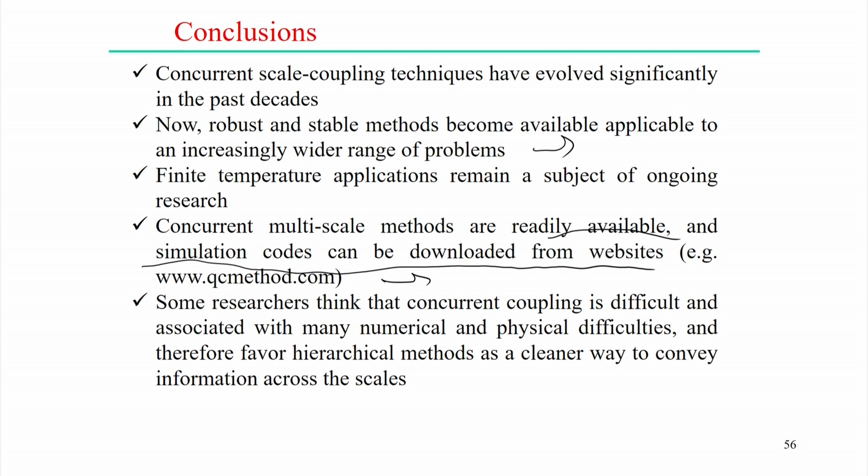Nowadays it is available. Finite temperature applications of course remain a subject of ongoing research, and concurrent multiscale methods are readily available—simulation codes can also be downloaded from different sources. People find interest in doing that, but some researchers still think concurrent coupling is really difficult and associated with many numerical and physical difficulties.

So therefore they favor hierarchical approach methods as a cleaner way to convey information across the scales. So thank you very much for your kind attention.